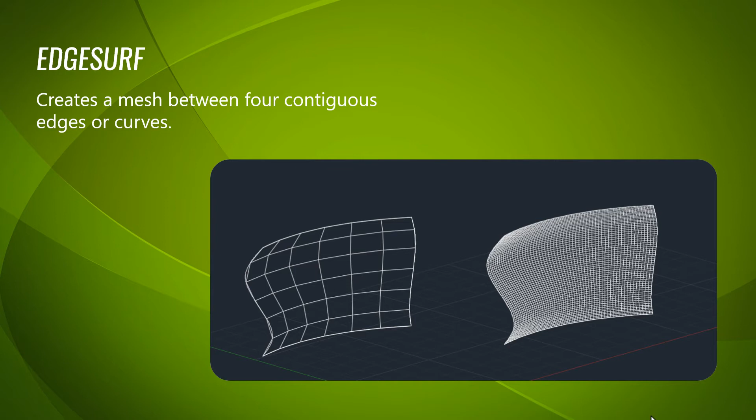Now let's see these options in the software. Consider this as my 2D drawing. If I want to cover up this 2D frame with a surface, we may think of using 3D face, which we've learned earlier. But in the 3D face command, we have to show 3 or 4 corners to cover an object with a surface. Here we have 2 corners, but when it comes to this side, it is an arc or curved edge, so it's not practical to show corners in this situation. So 3D face is not possible to use here.

So in such situations which contain curved edges, we basically go for EdgeSurf. In order to use EdgeSurf, we will type EdgeSurf like this and press enter. Now it is asking to select the objects one by one which I want to make as a surface.

As we already know about the surf tab parameters, in EdgeSurf we have to adjust both surf tab 1 and surf tab 2 to get it smoother. Going with the default value of 6, we will go and select the objects one by one: this one, then this one, then this one, and this one. Now you can see that it already creates a mesh or surface on the design object.

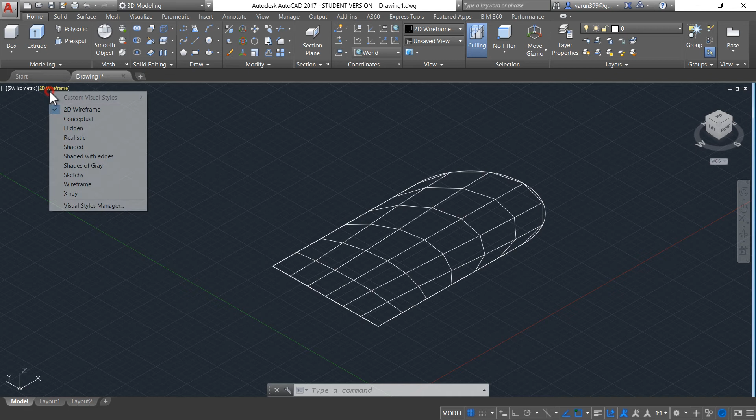Now when you change your 2D wireframe to shaded, you can see that it already creates a surface like this. But it's not yet smooth at the curved edge, because the surf tab parameter is not enough to make it smooth.

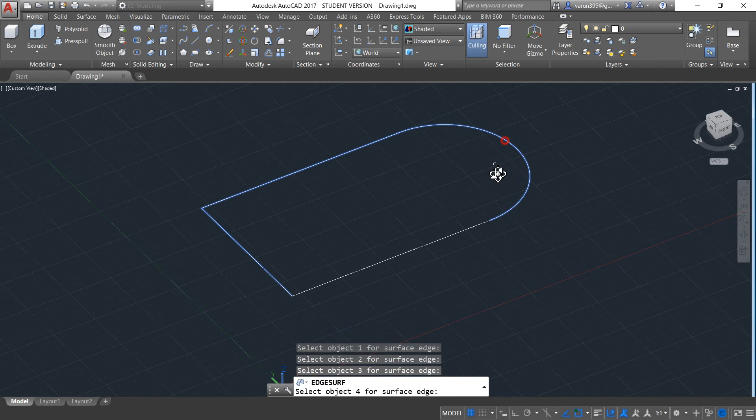So what we can do is select the surface and delete it for the time being, and change the surf tab parameter - surf tab 1 - to 60. Similarly, I will change the surf tab 2 parameter to 60 as well. You can change it to any other higher value according to your need. Now I will do EdgeSurf again, select the object from here, then here, then here, and the last one here. Now you can see it's much more smoother to get the surface like this.

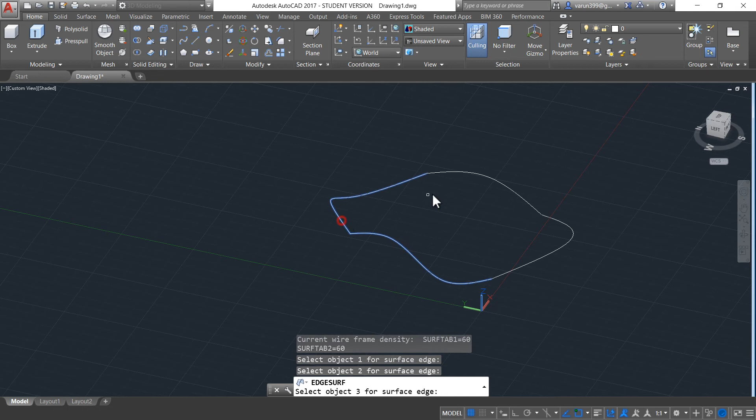Now consider I have an object like this made up of splines, which already has an alignment towards all the axes. If I want to make a surface, I can use EdgeSurf again and press enter. With the surf tab value 60, I will select the objects one by one like this, like this, like this, and like this. Now you can see it readily creates a surface like this. So there's a wide application of EdgeSurf in modeling and designing in AutoCAD.

Now let's move on to the next topic: RevSurf. RevSurf creates a mesh by revolving a profile about an axis. That means if you have any object and an axis, you can use RevSurf to revolve that object about that axis. It's basically used to create any cut section and revolve it to create an object.

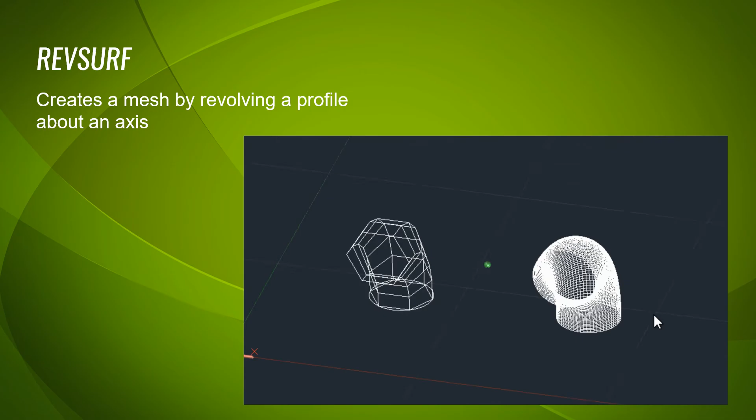Now let's see these options in the software. Consider I have a circle like this, and a line like this. Now if I want to create a surface with a cross-section shape like this and revolve it about an axis like this, I can use RevSurf. So the command for RevSurf is REVSURF, and press enter.

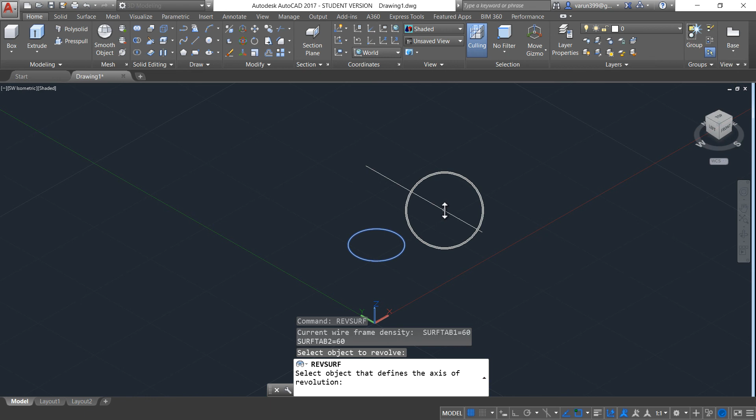The same wireframe density is also available here so you can change it to make it more smoother. With the value 60, I will select the object which I want to revolve - this is the object I want to revolve. After selecting the object, it will automatically ask for the object that defines the axis of revolution. So this is the object which defines the axis of revolution. I will select this one, and it automatically takes it.

Now it's asking to specify the start angle - at what angle do you want to start your surface? By default it is 0, and I will go with 0 itself. So I will press enter.

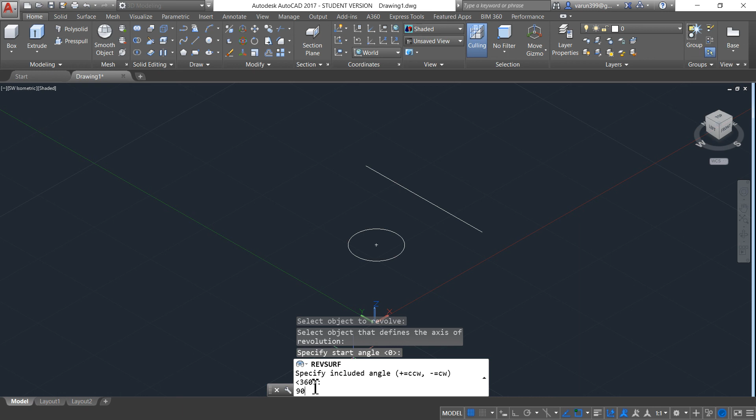Now it's asking to specify the included angle. Included angle means to what angle do you want to revolve it - you can make it 90, 180, 270, or entire circular as 360. The default value is 360, but for the time being I will give the value as 90 and press enter. Now you can see that the circular profile has been revolved about the axis given here to create an object like this.

Pretty nice, right? This is a surface made in a revolved manner.